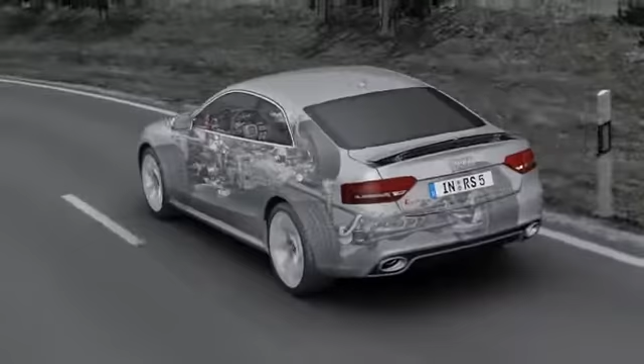The Quattro permanent four-wheel drive system has a long tradition stretching back over 30 years. It permanently and optimally distributes the power from the engine to all four wheels, providing a high level of active safety and reliable traction on practically all surfaces and optimal straight-line driving. Its permanent safety advantage makes it far superior to other all-wheel drive systems that have to be activated.

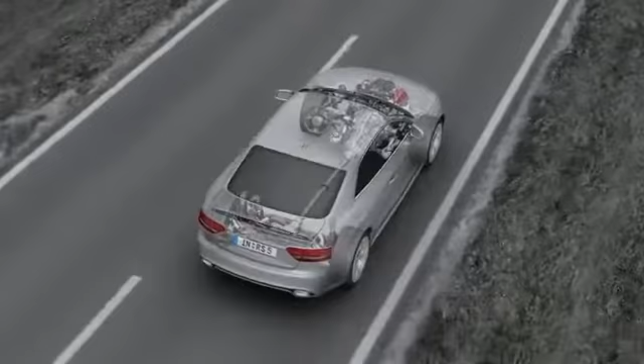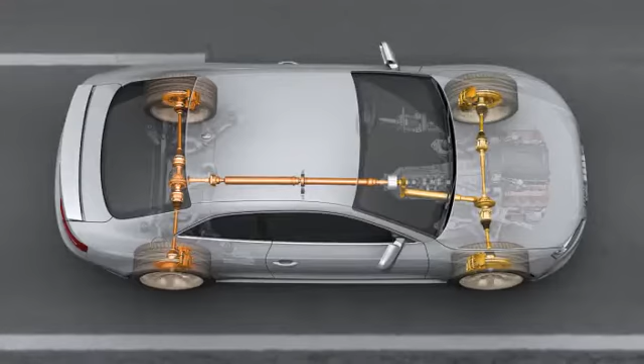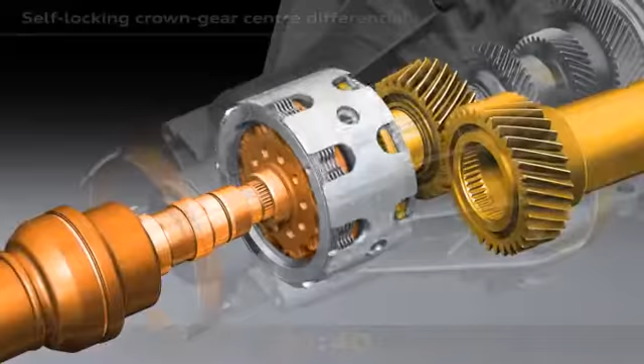The principle is simple: just as four brakes provide for better deceleration, four driven wheels provide for better acceleration and greater lateral stability. The new Audi RS5 sees the introduction of the latest generation of Quattro with crown gear, center differential, and torque vectoring. The task of the center differential is to distribute the drive force of the engine to the front and rear axles.

If, for example, one of the wheels on the front axle starts to spin, the crown gear center differential will immediately spring into action. Up to 85% of the drive force will promptly be fed to the rear axle. This can be seen here with the turning differential gears.

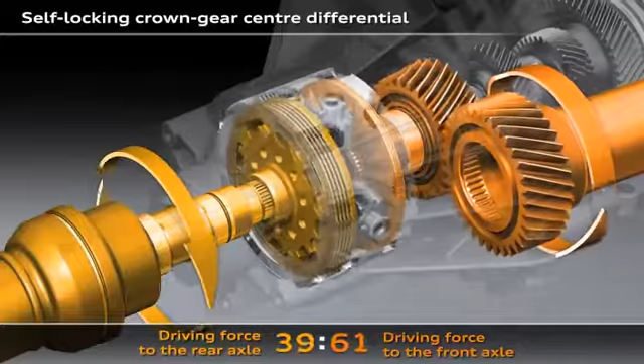If the wheels on the rear axle start to spin, the crown gear center differential will immediately feed up to 70% of the drive force to the front axle.

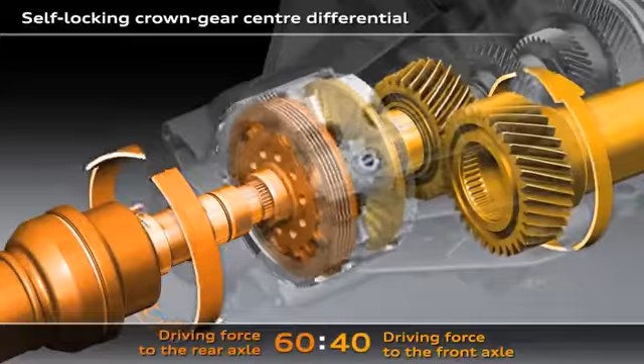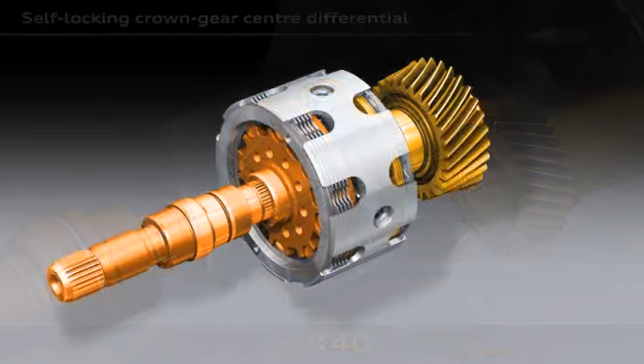In its basic configuration, 60% of the drive torque is fed to the rear axle and 40% to the front axle. Here you can see the structure of the crown gear center differential, the heart of the Quattro drivetrain.

The drive force is introduced via the components illustrated in grey. The gold-coloured parts drive the front axle and the bronze-coloured parts drive the rear axle.

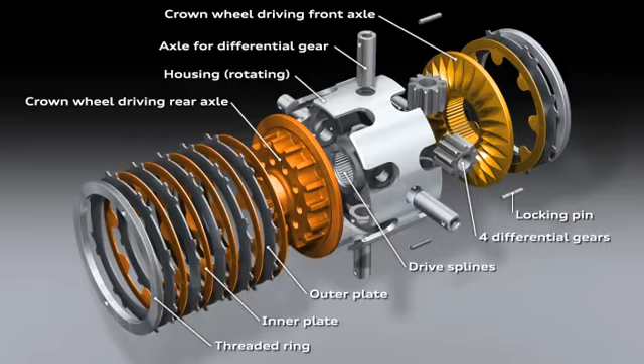If there is a difference in speed between the front and rear axles, the center differential will spring into action and generate a locking torque with the plate packs. That means the drive force will be distributed to the two axles according to actual requirements, allowing more power to be transferred to the wheels.

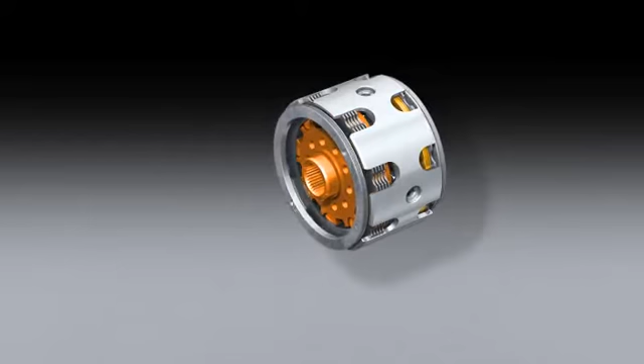The new crown gear employs a metal cap to keep flow losses to a minimum. The basic distribution is generated by gears with different diameters meshing with the two crown gears.

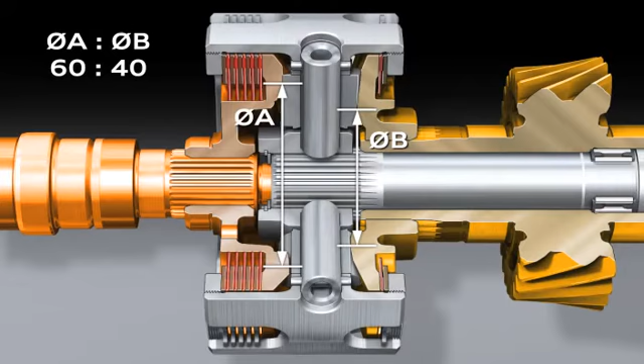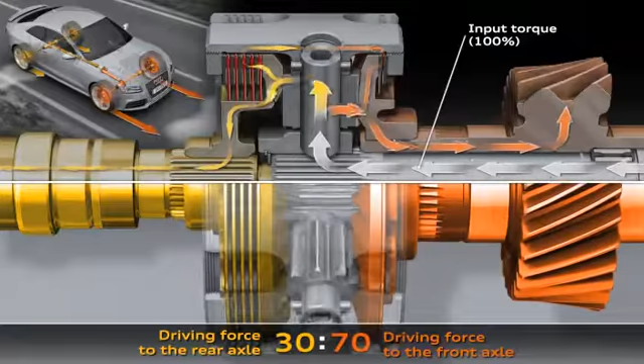The arrows symbolize the flow of torque or force. For example, if the wheels on one of the drive axles are unable to transmit the full force, the center differential and its differential gears will spring into action. The force will immediately be fed to the axle with the better traction, with zero time lag.

Without ESP intervention, this happens with up to 85% of the force to the rear axle and up to 70% to the front axle. With an electronic control system, up to 100% can be fed to a single axle.

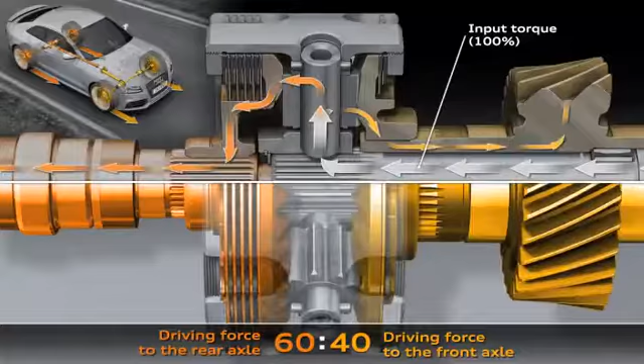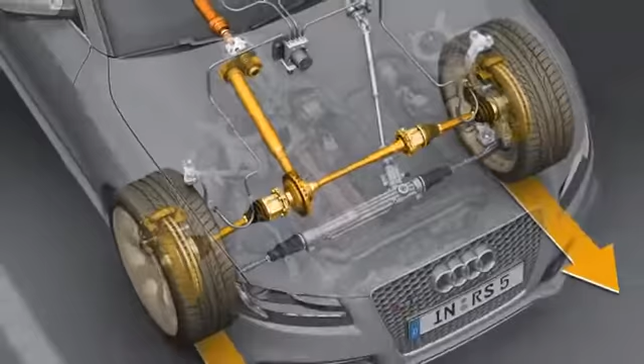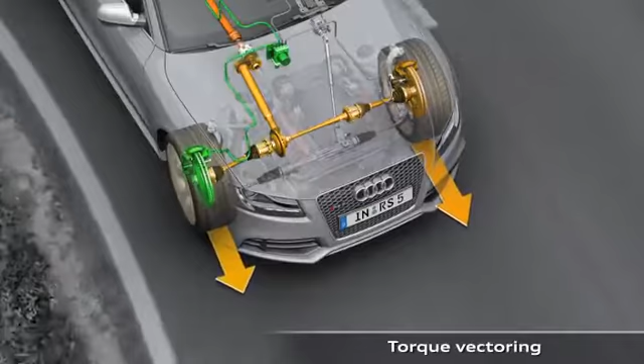The good dynamic performance characteristics of the Audi RS5 with crown gear center differential are noticeably extended in conjunction with torque vectoring. An additional steering torque is generated according to the situation and the driver's needs.

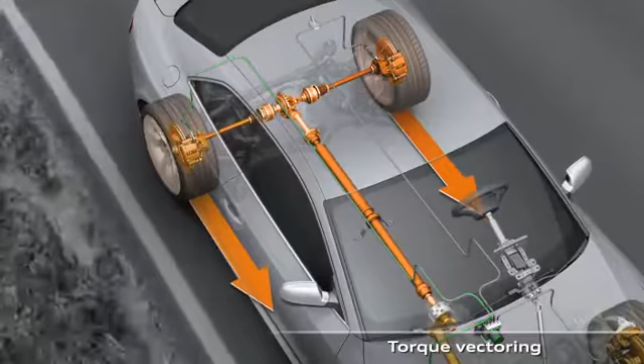Finely metered braking torque is applied to the two wheels on the inside of the curve, creating a difference in drive force on the left and right-hand sides. At the same time, the longitudinal drive force distribution is optimized according to the driving situation by the ratio of the brake force application on the front and rear axles.

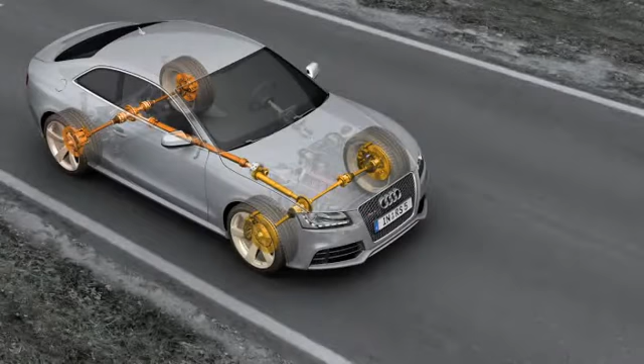When pulling away and when accelerating rapidly, more drive force is fed to the rear axle. The combination of crown gear center differential and torque vectoring on the Audi RS5 provides for precise handling even when cornering.

This happens with zero time lag, in accordance with the driver's steering and acceleration commands. The dynamic drive force distribution allows excellent exploitation of the traction potential, good track stability, and outstanding agility.

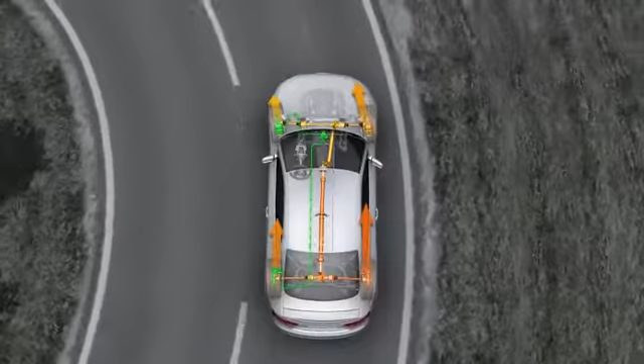The torque vectoring system was developed by Audi to act before the wheels start to spin, reducing undesirable effects. The combination of the Quattro drive system with crown gear differential and torque vectoring gives the Audi RS5 outstandingly precise control right up to the car's handling limits.